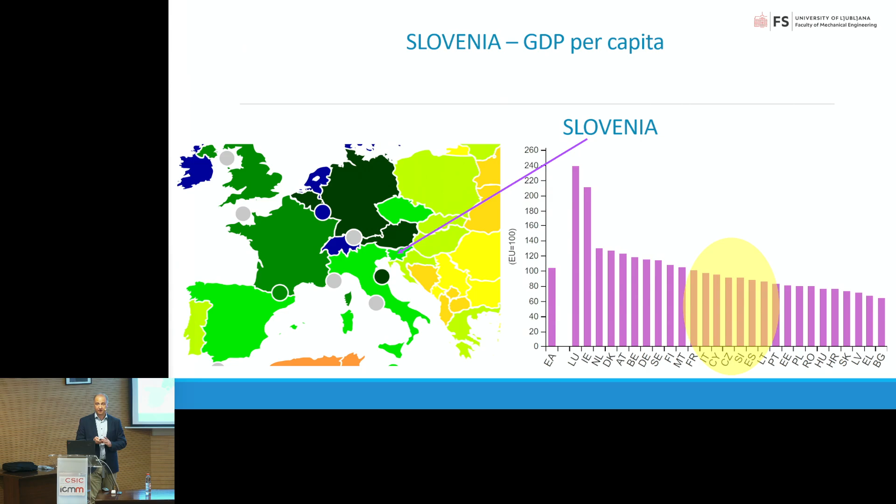Okay, so just shortly about Slovenia. It's a very small country, we have only 2 million people. The surface is quite large, and we have the third largest European forestation, after Finland and Sweden, so a lot of forests. The GDP is not so bad - we have the best economy of the ex-communist countries who joined the European Union.

Also, we are really happy because, you know, in old buildings it's very difficult to find place for the equipment. So we sometimes need to demolish prototypes just to have more space.

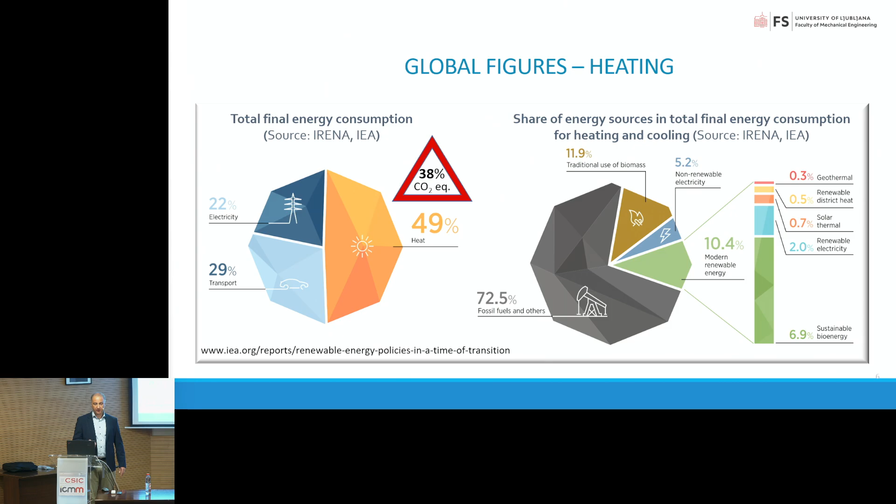What is more is that we waste a lot of heat. We waste most of the heat from different sectors, and related to global energy consumption, this waste heat presents 50% of the final global energy consumption. So it's also 50% of the heating and cooling we need from the final energy use, and actually 50% of the final energy use ends as waste heat, which is wasted. This is really funny to see these high numbers, because they are much higher than in any transport domain. And there is, of course, also large room for improvements.

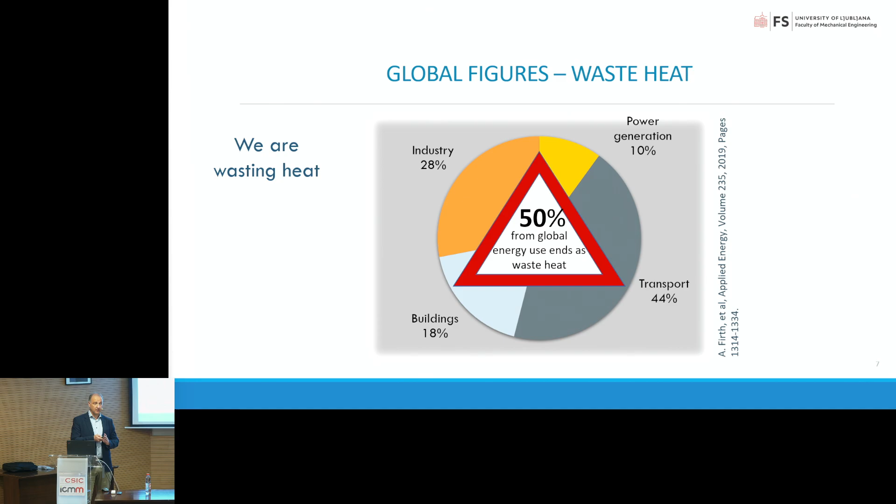When we focus on cooling, that's a bit different. That goes about 20% of final electricity consumption - global electricity consumption is actually related to air conditioning and cooling. And refrigerants, today's refrigerants, cause 8% of global warming emissions.

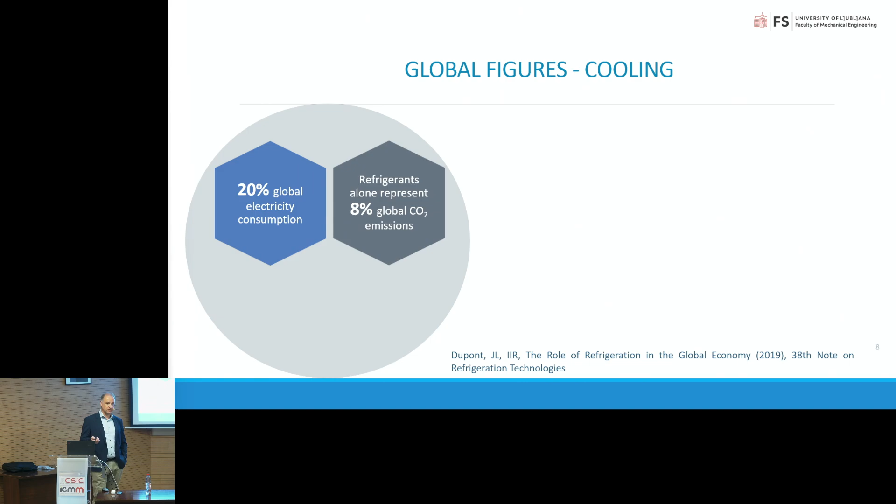I'm speaking about the refrigerants which are related to most of our devices which we use, and these are actually vapor compression devices. What's interesting to see is how the International Energy Agency sees the future development of air conditioning and cooling. They say that it will triple until 2050, which is an enormous number.

Now somebody could say, okay, that's because of global warming. No, it's not so much. We have well-insulated houses, nice glassy buildings, and a lot of internal heat sources from our computers. We also have higher comfort of living than in the past. So all of this together is causing the increase in the needs for air conditioning and cooling, and as the world develops further, these needs need to be covered.

Now the refrigerants, starting from the beginning: the first refrigerants used in vapor compression were natural refrigerants. Then we jumped to chlorofluorocarbons, which caused ozone layer depletion. Then we had others like hydrofluorocarbons, which caused global warming. And slowly we are trying to get rid of them.

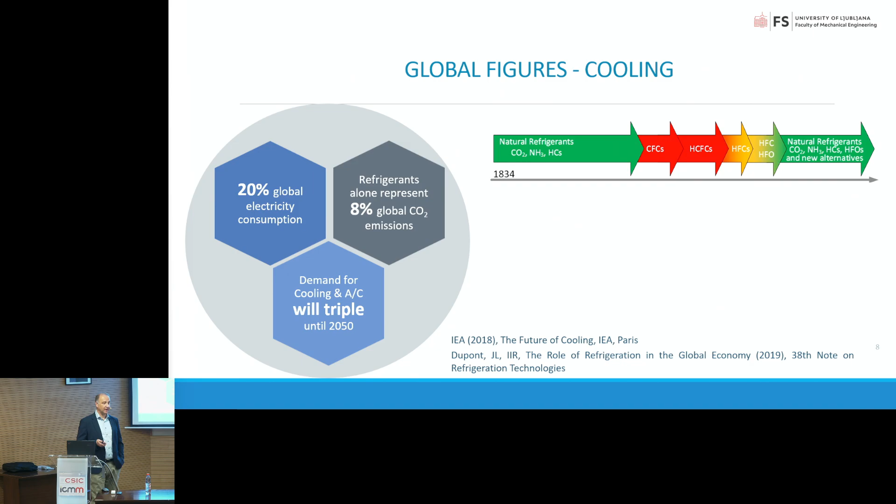Coming back to natural refrigerants - in general, the future of vapor compression and air conditioning will be related to natural refrigerants or hydrocarbons. The problem with these refrigerants is flammability. We have explosion hazards in some cases, toxicity, high pressures - and that's related to all the natural refrigerants, or most of them, and hydrocarbons as well. But actually this problem can be solved.

What you will see is another type of refrigerant, mostly developed in the United States, related to US companies. It does have strong environmental impacts, but I would say those who work with these refrigerants will not really admit that this is true. I speak about hydrofluoroolefins, which cause acidic rain - this was very well investigated by Danish and German researchers. So this was proved, and it is very problematic.

But most of the people who see the future of vapor compression say, yeah, these hydrofluoroolefins could actually replace the problematic hydrocarbons, or natural refrigerants, because of their weaknesses.

I think before going into the development of some kind of technology, we need to know what the existing technologies are. We need to know what we are doing, because just doing something without studying what's going on in the market, or what exists, doesn't make sense. We cannot claim, for instance, that a photovoltaic cell of 10% efficiency would be better than the one on the market if we do not know what is on the market. So this is actually a process of learning.

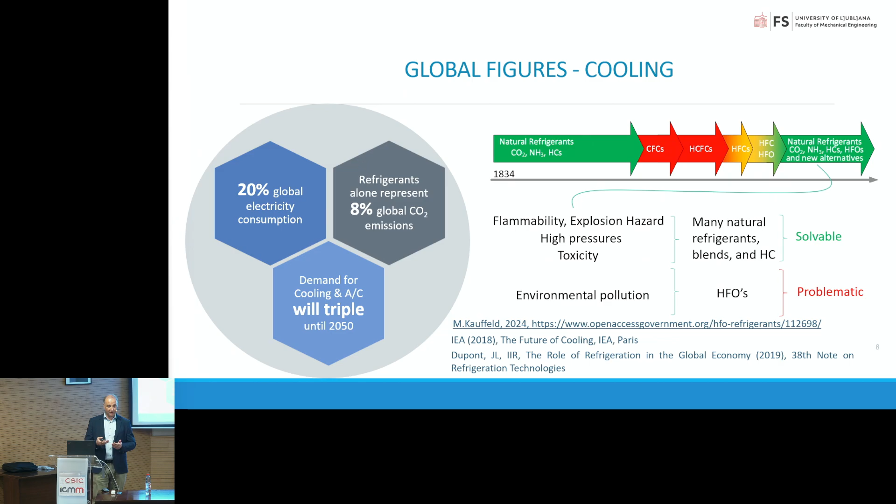What you can see here are three diagrams of air conditioning and cooling. In the first diagram on the left side, you can see a kind of Carnot efficiency of cooling-related devices, starting from cryogenics up to room temperature and above. In this blue region, which you see here, are market-available devices.

So if we develop something which is below this, it would not really make sense from the point of view of our statement that we want to have better efficiency. We need to overcome this if we want to beat, or improve, the sustainability of any kind of technology.

And it's not only this, but when we want to sell it, the very important part is the cost. And the cost is always related to the power density of the device. So you need a small device which weighs nothing, costs minimum, and performs excellently. Of course, that's a dream.

This is the real data of vapor compression systems related to cooling power. You can see smaller devices have a bit bigger mass relative to power than big devices - huge devices, which you see here. It's really a huge number, megawatts.

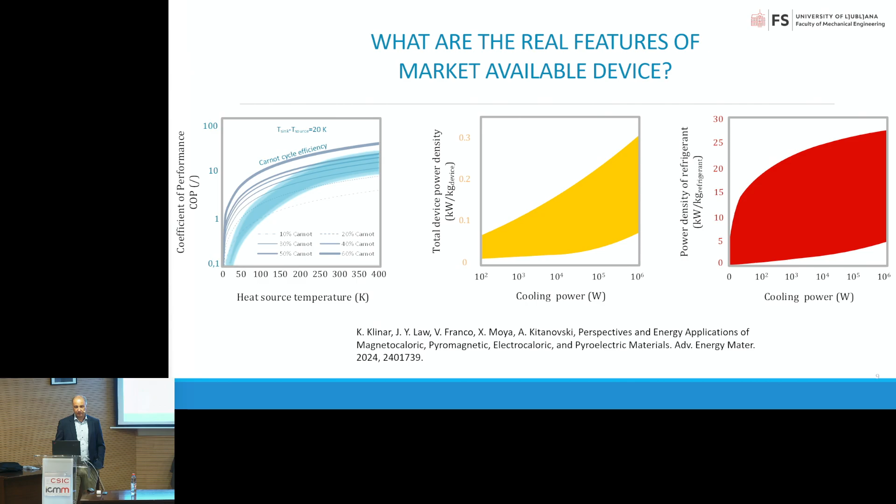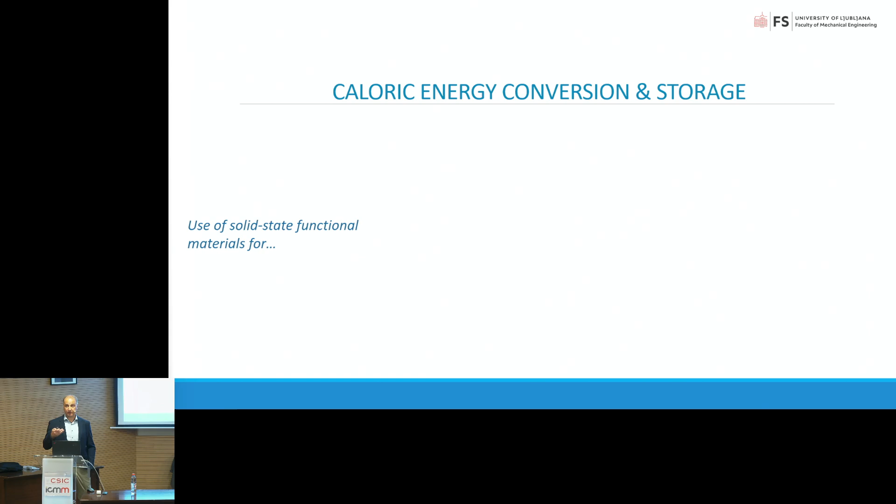This is how I would like to show why we do that. So caloric energy conversion and storage, we see as the potential for cooling, as the alternative to vapor compression, so alternative to refrigerants, but I will show also other potential theoretical advantages. It's nice for heat pumping, energy harvesting, and also solid state phase change thermal storage. These four domains are of interest to researchers who do research in caloric technologies.

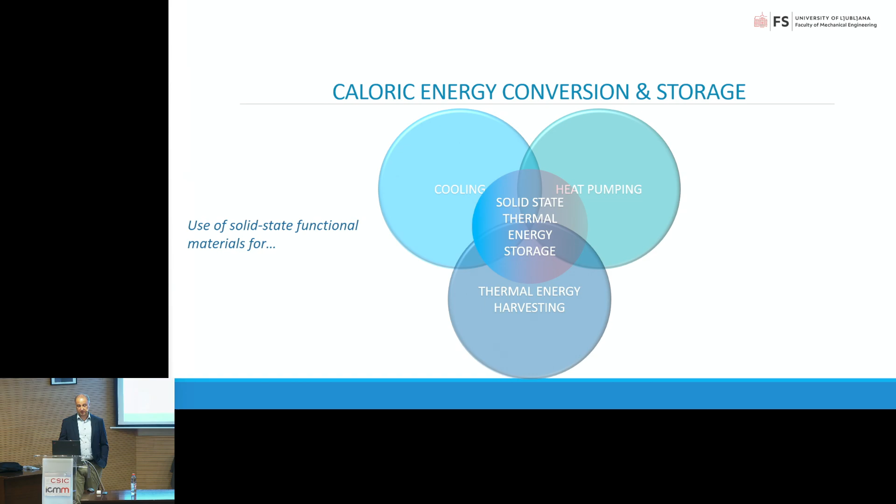Now, before going to calorics, I would like to address why we do that. First, the second law efficiency of devices based on caloric effects can beat vapor compression. Vapor compression takes over 95% of the market, and it is the best possible technology for refrigeration, air conditioning, and heat pumping. Energy efficiency first is also the European directive, so we are really targeting something that could go beyond.

And theoretically it could, because the effects can be really reversible when you compare, let's say, vapor compression, which is a polytropic process thermodynamically and of course not isentropic, and the changes of magnetization and demagnetization of, for instance, gadolinium magnetocaloric material, which are reversible. So the entropy change will be zero, or almost zero, when you magnetize and demagnetize. That means we can really gain a lot in efficiency.

But there are, of course, other problems associated with this, and I will come to that later. So the possibility of having no moving parts is very important. Vapor compression uses moving parts - we have compressors based on pistons, turbines, and so on.

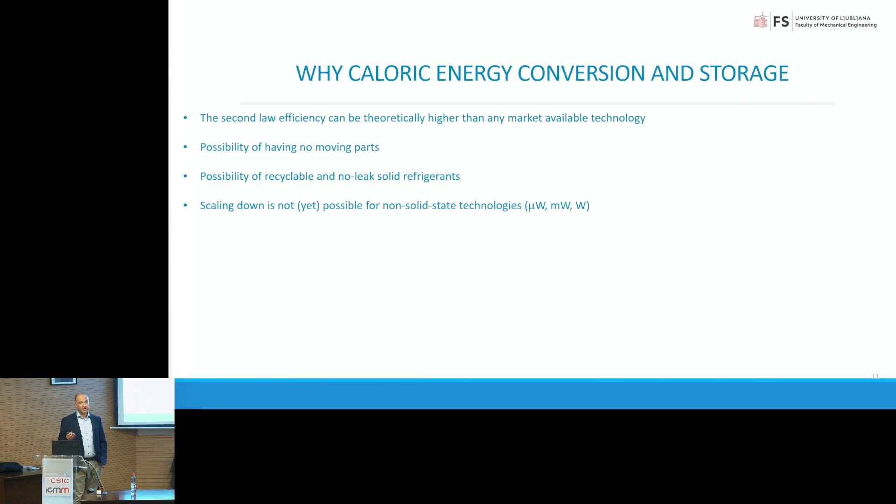Possibility to recycle solid refrigerants, which cannot really be done for vapor compression. Scaling down vapor compression is not possible for microwatts, watts, milliwatts, or up to the range of 10 watts of cooling.

And we see today, for instance, your household refrigerator will in future probably need only 10 or 15 watts of cooling, because they will implement vacuum insulation inside, improving it so much that you will need a very small power to run it. And vapor compression is not ready for this, because when you go to small powers, the efficiency substantially drops.

New and different or special applications are not possible with fluidic-based devices. Vapor compression is also limited to the temperature range between minus 100 degrees centigrade up to about 250 degrees. Above this it will not work, and below this as well, not.

Heat to power energy harvesting below 80 degrees is not possible with most devices. The only technology today which really allows conversion of heat into useful work is thermoelectrics.

And caloric technologies are actually a kind of temperature differential device, like Stirling engines. So in any kind of temperature differential they would actually operate - it's not important at which temperature level.

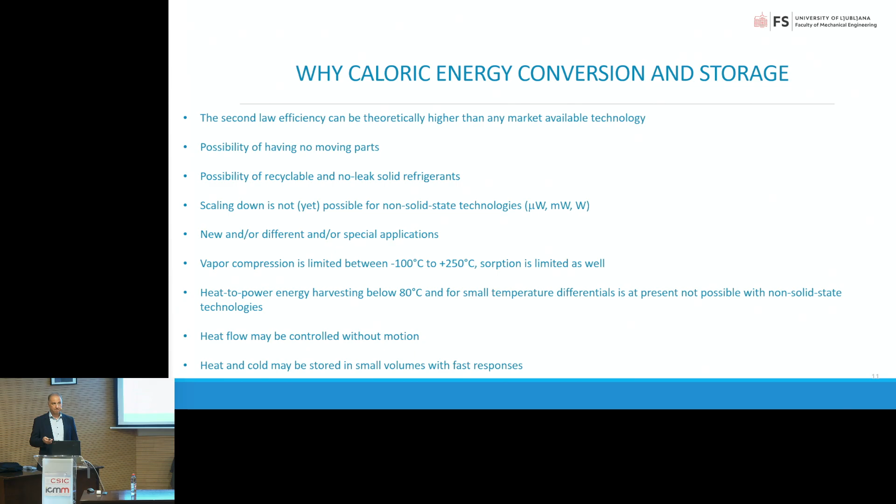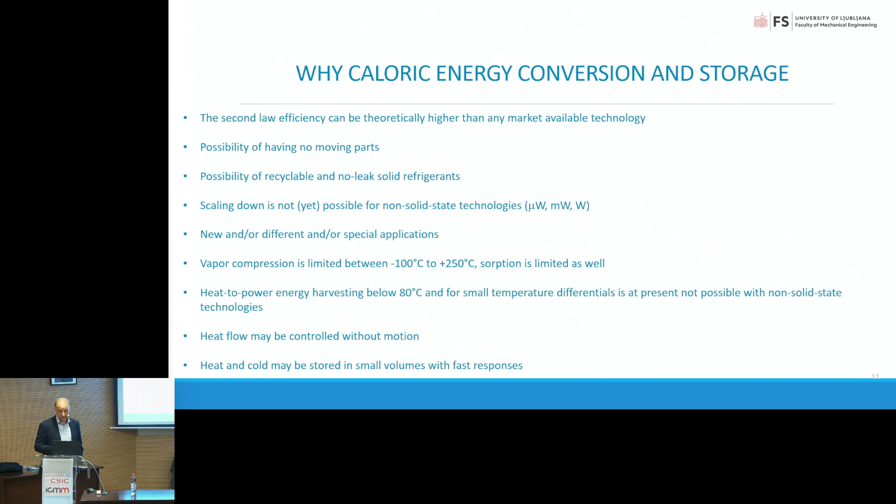About the storage, I will come back to this later, but we can store heat in phase change solid state materials. On the other hand, all the caloric materials are phase change solid state, so this is also the interest we are looking for, because we have phase change there. You can really see this when you observe the specific heat, and then we are dealing also with first and second order transitions, of course, but there are plenty of materials.

Now, if I just jump to the four main effects, I'll go slowly. Let's say we deal actually with a kind of caloric or pyro effect. Pyro would be related to power generation, and this one for cooling and heating. That means we can use magnetocaloric materials where we change order.

By applying the magnetic field, or we change order in ferroelectrics by applying electric field. An analogy from the point of view of thermodynamics is super cool. Really, it's very easy to understand. When you understand one cycle, one type of the principle, you can understand all of them.

Of course, if you enter from the other point of view and study materials, this is totally different. So people from electrocalorics do not collaborate with people from magnetocalorics. They're both solid state physicists, material scientists, but they don't know each other. So we brought them together. But one is playing with electroceramics, another is playing with polymers, which is soft matter, and the third one is interested only in magnetism. So it's really plenty of different societies which you need to merge.

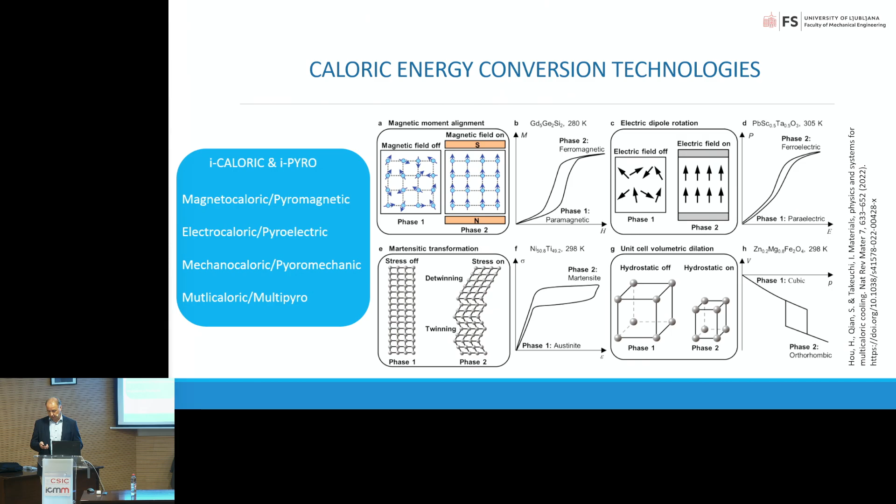So by this, we can really build different kinds of principles of devices, whether applying a magnetic field, electric field, stress, or we can combine even those. There are possibilities that you make a composite of two materials, or you have a multicaloric effect where you gain two effects. For instance, you apply electric field and stress, and you get a kind of elastocaloric effect together with the electrocaloric effect to multiply the change.

This change corresponds usually to adiabatic temperature change, we say. So the temperature jumps, the material entropy goes down usually, and the total entropy increases, or stays the same, more or less, unless you have hysteretic material. This is why the material heats up, and when you release the field, it will cool down. Of course, we also know antiferromagnetic and antiferroelectric materials, which will cool down when applying the field.

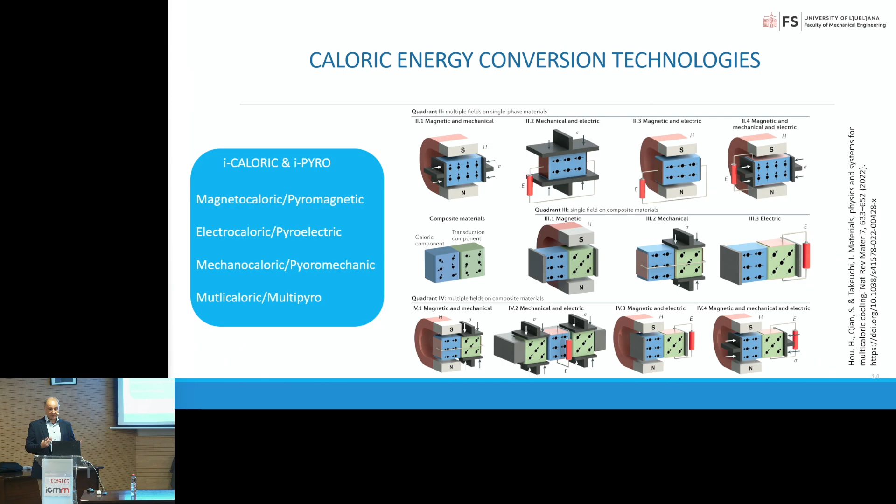So we have a lot of different possibilities here. And now the device which you can build needs also heat transfer, because it's not only applying the field, but you need to shift and bring the thermodynamic cycle, which means you need to bring heat from the heat source, and reject heat to the heat sink. This is normal operation of a device. I will come back to this issue later.

Just to speak about solid state thermal storage, these are some advantages we see, for instance, in solid state change compared to paraffins and hydrate salts, which are commonly used in phase change material storage. The latent heat here is smaller, but the density is bigger. They operate in a narrow temperature interval. That could also be related to calorics. But if you have hysteresis, usually you have a bit bigger temperature span.

But what's more important is you cannot attach paraffin directly to the working fluid. You need a kind of intermediate heat transfer surface, which requires volume, and this increases the irreversible heat transfer, so the device is not as fast-operating as one based on caloric materials.

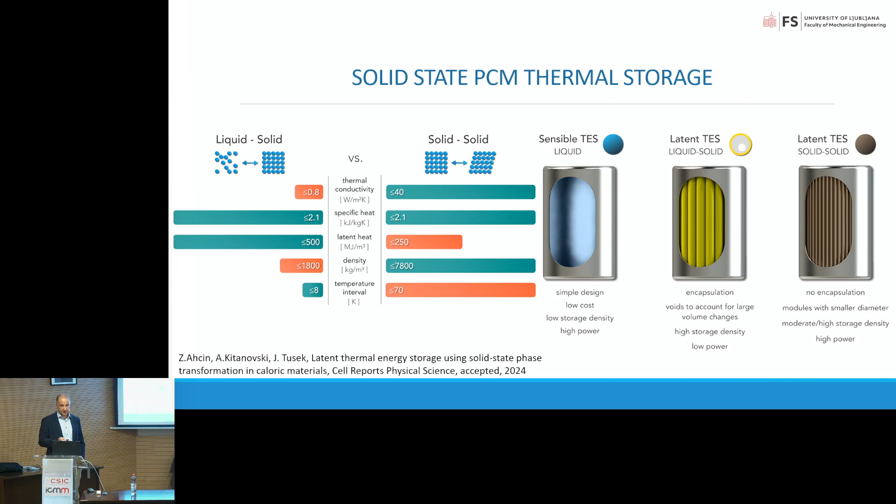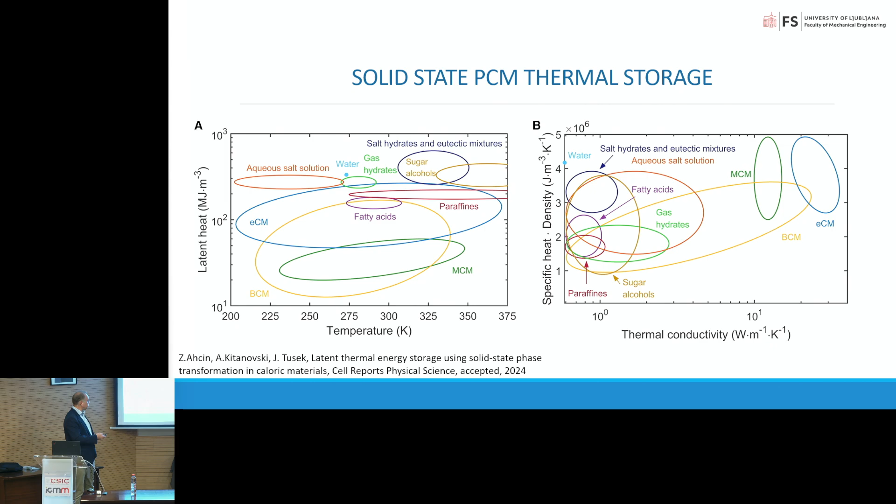Okay, so the basic principle of operation, I will explain through the active magnetic regeneration. This is the most basic process which is used for cooling. The process will be very similar in electrocalorics or barocalorics, and I would say the elastocaloric.

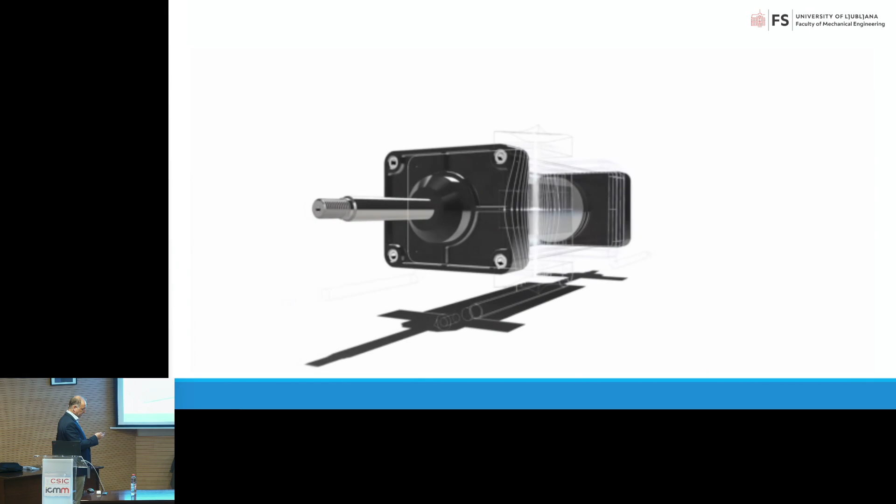So let's say now this cycle, you will see a bit of the regenerator. That's very primitive, but you see two pistons. These two pistons will move the fluid, and inside this structure you see a kind of magnet, magnetic flux lines, and you have two heat exchangers here.

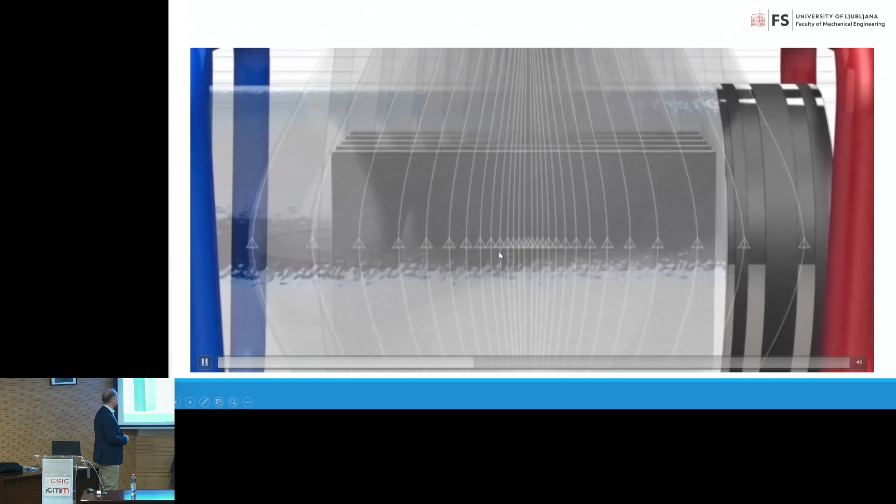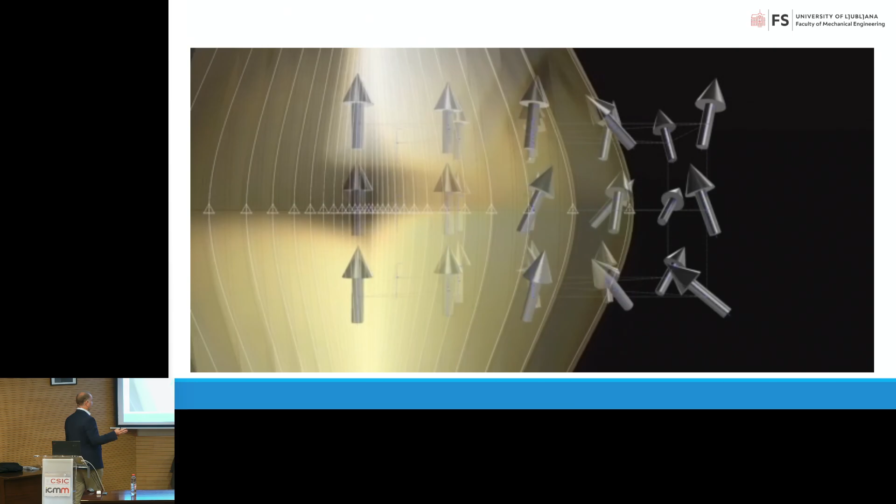This is a heat source, this is heat sink. And of course, this magnet will cause the ordered state in the material, which means it will heat it up. Here you can see a kind of material in a form of plates - these are plates of magnetocaloric material. By shifting the field, we are changing the temperature of the material.

Now you will see later on different forms of this material. In general, when we apply the field, we need to push the fluid from heat source to the heat sink, just to evacuate the heat which was generated away to the heat sink. Then we move away the magnet, or let's say the field source. The material will cool down, and we push it in the opposite direction. That means we have a kind of oscillation of the fluid flow inside.

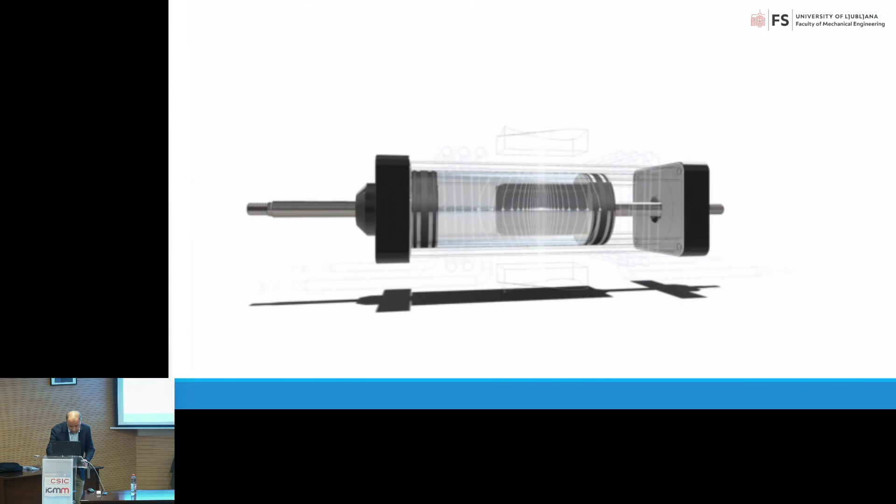This is how, in a steady state condition, after a while you can reach a temperature gradient between the heat source and heat sink, which means you can cool down or you can heat up.

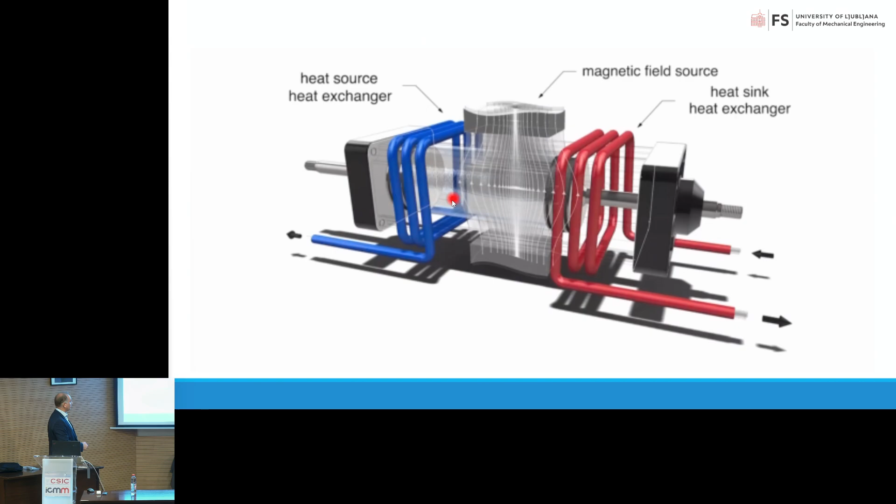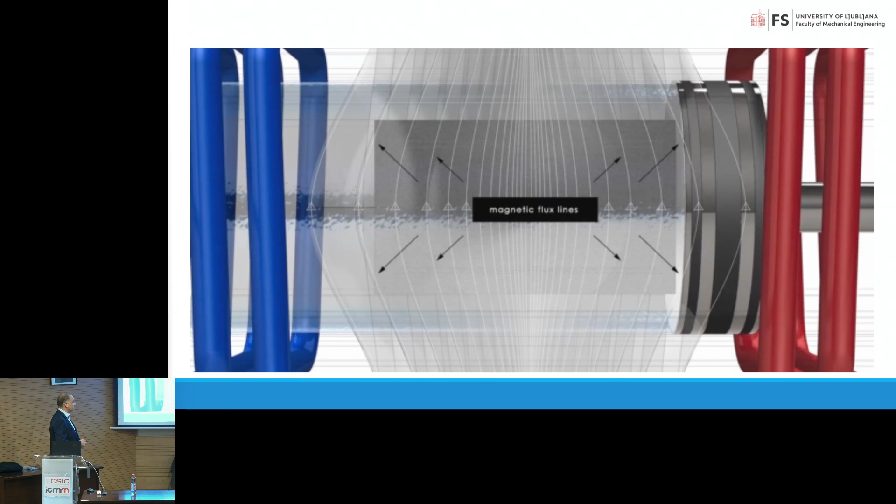So just again to repeat, the point is that you always need to oscillate the fluid, but it should correspond to the movement of, or let's say the change of the magnetic field, electric field, or stress. This is the basic principle, and of course you see moving parts here, because most of the devices built in calorics are based on moving parts.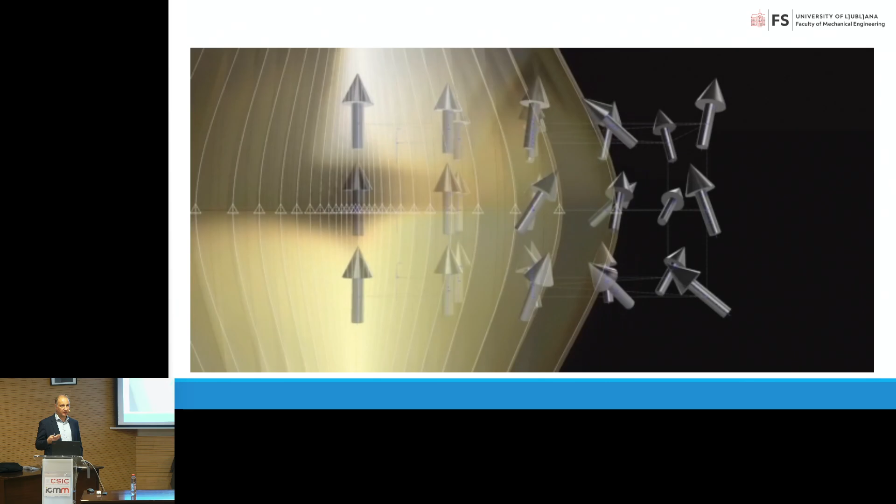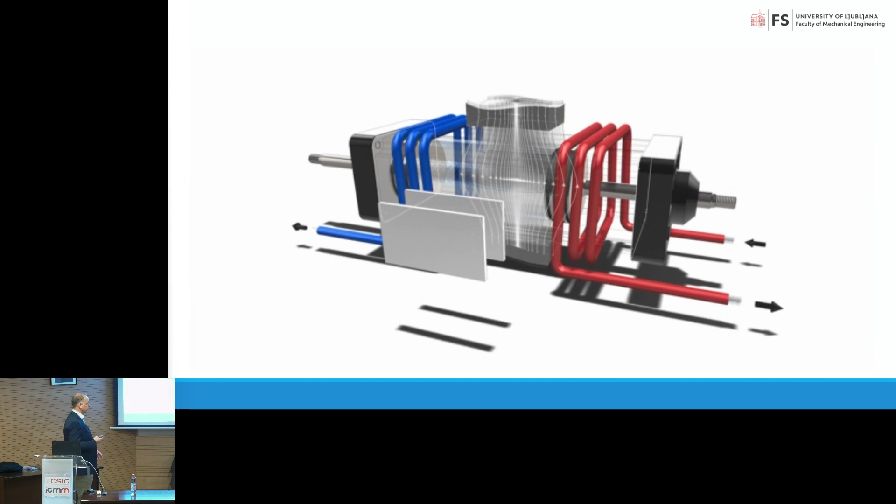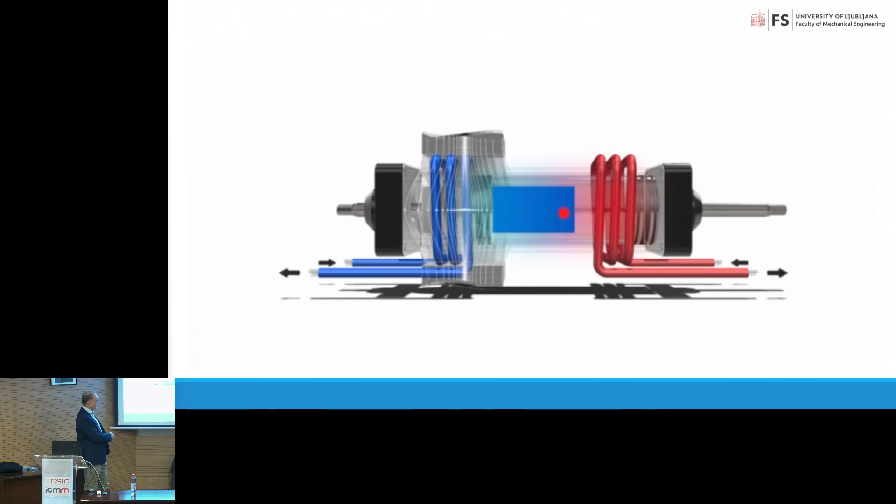Related to regenerators, for instance in magnetocalorics, you can use packed beds of spheres, parallel plates, honeycomb structures. These may be ordered structures, or disordered, like packed beds. You can see the changes of colors show what happens when the magnet goes up - the material will heat up, but you can always see some kind of gradient. In a steady state, you would see the gradient between the heat source and heat sink.

Now, these are magnetocaloric materials. We cannot do the same with elastocaloric. In elastocalorics, usually you will have a kind of wires, or a honeycomb structure. In electrocalorics, usually people will use plates. They can make a structure like this too, but it's quite difficult - it depends what kind of material you use.

Usually nowadays we use a kind of ceramic multi-layers. Then there are thin films, but thin films are really thin. If I speak about polymers, you need to make a bigger structure if you want to get anything out of it. Otherwise, we speak about milliwatts of power. So this is actually a challenge.

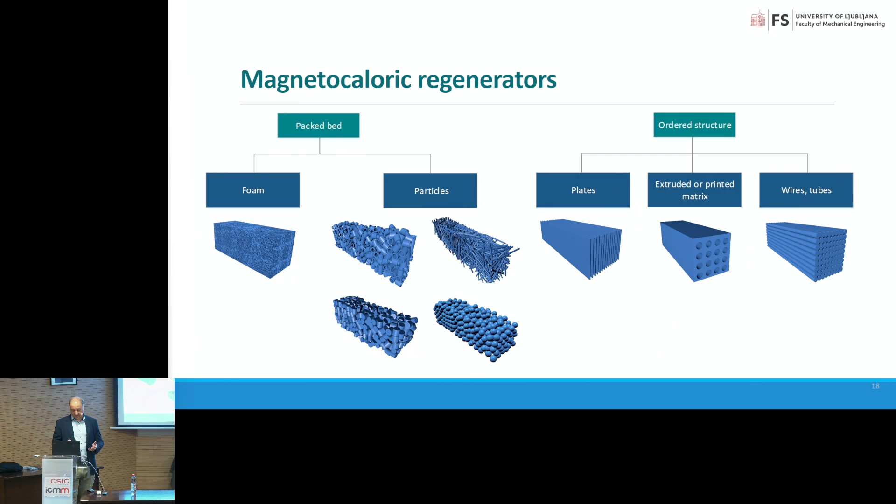So where are we today? I will go shortly through the last 20 years of developments in magnetocalorics. I show magnetocalorics as an example because it is the oldest of the caloric technologies and the most developed. It started, I think, in 1997 with the first prototype for room temperature application. You know that for magnetocalorics, people won a Nobel Prize, because it was recognized as one of the new technologies for cryogenic cooling to approach 0 Kelvin.

But then nobody touched this topic really until the 1980s, 1990s, and you can see here the evolution a bit. I will not show everything, but in the last 20 years you can really see real prototype devices, based on rotation of magnetic fields, linear movements over the magnetocaloric material. What I'm showing here is actually mechanical engineering now. But for this, you need a heart of the machine, which is the magnetocaloric material. This is why the collaboration started, which was very interdisciplinary between different domains, which is very interesting.

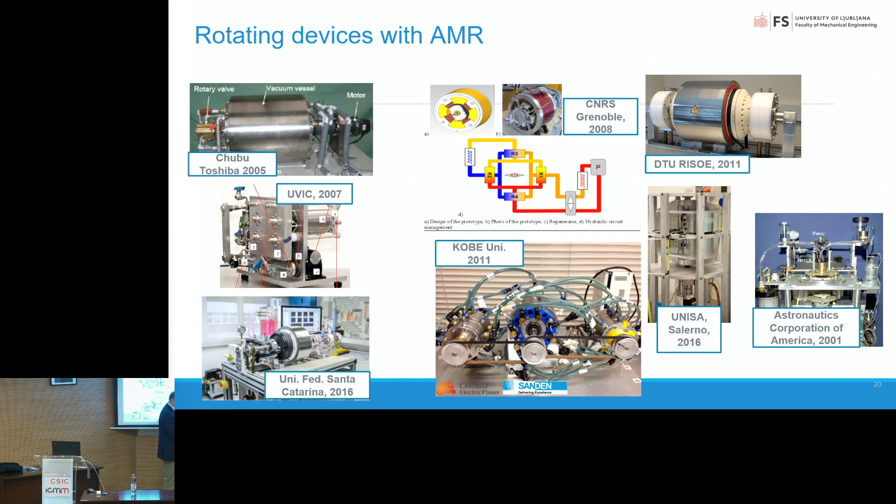I will show you later - that was one of the prototypes which was based on permanent magnets. Most of this is only permanent magnets here, which you see. But then, in later stages, these were really huge devices. Then we got some companies, startups. That's a 10 kilowatt machine, they call it an air conditioner. I mean, this is really heavy, but still people are trying to do that. We were involved in development of this one in collaboration with DTU.

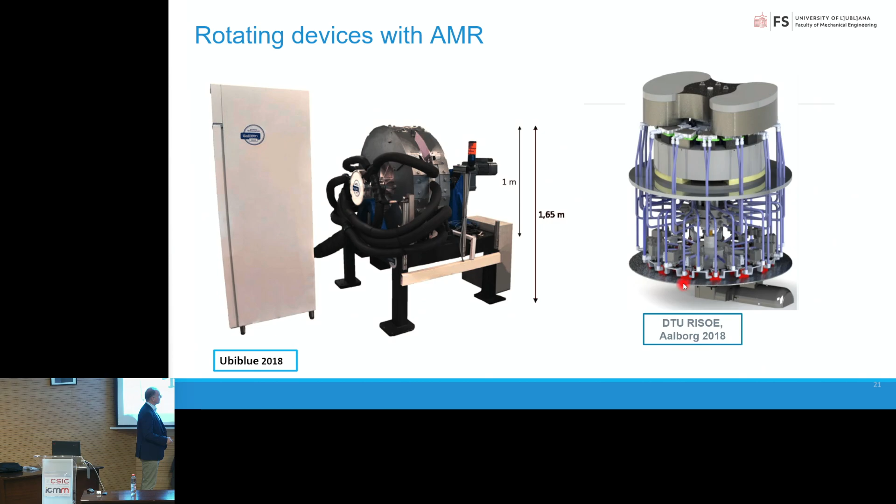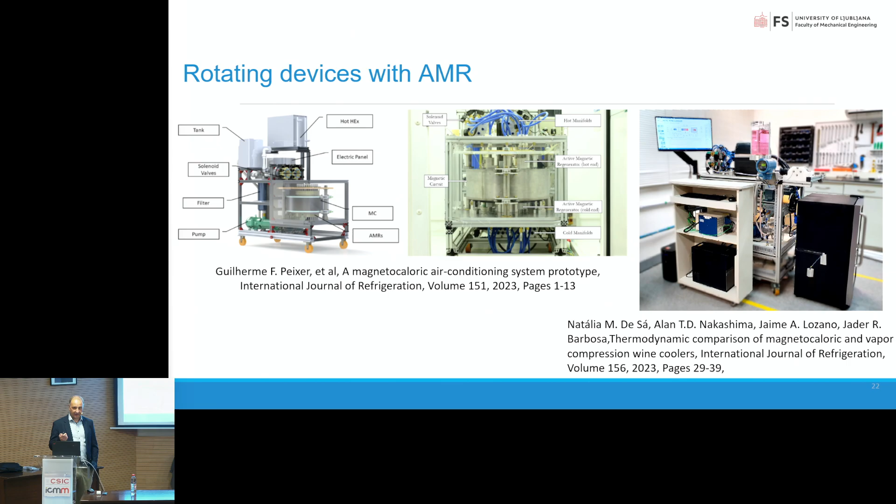And that was actually a household heat pump. We were really trying to do many different kinds of devices, and most of them, in general, were actually rotating - meaning rotating magnetic field or rotating magnetocaloric material in a static magnetic field provided by the permanent magnet assembly. So we learned a lot about how to design magnets. I can design today very nice permanent magnets. I learned to do that because I was forced to.

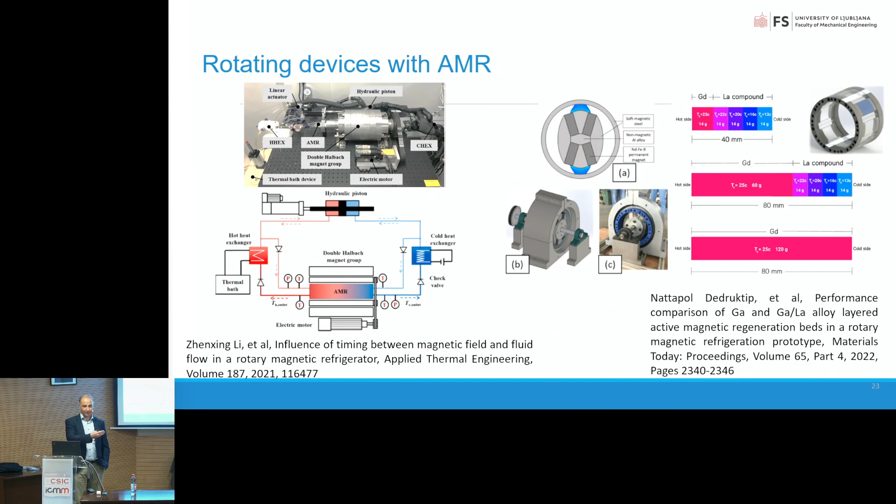This is how I learned also about magnetism. And by having colleagues from material science, I learned a lot about the materials because we were sitting in the same room, speaking to each other and listening to each other. So that was really nice.

One of the last prototypes we built was actually for Gorenje Hisense company - that was a wine cooler. For this particular case, we used an electromagnet because we developed a new type of magnet which has a very rapid change of the magnetic field. We could run it with 50 Hertz, a step function of 1 Tesla in about 10 milliseconds. We have new ones now going up to 1.5 Tesla in the same time, but with even higher frequency.

Okay, but speaking about cryogenics, then we come to superconducting magnets. Of course, the higher the field applied, the larger the temperature span given by the material, and this is actually very important because the higher the field and the larger the adiabatic temperature change, the better efficiency you can get, because you compensate the big irreversible heat losses by having larger temperature spans when you are magnetized, polarized, or whatever with this material.

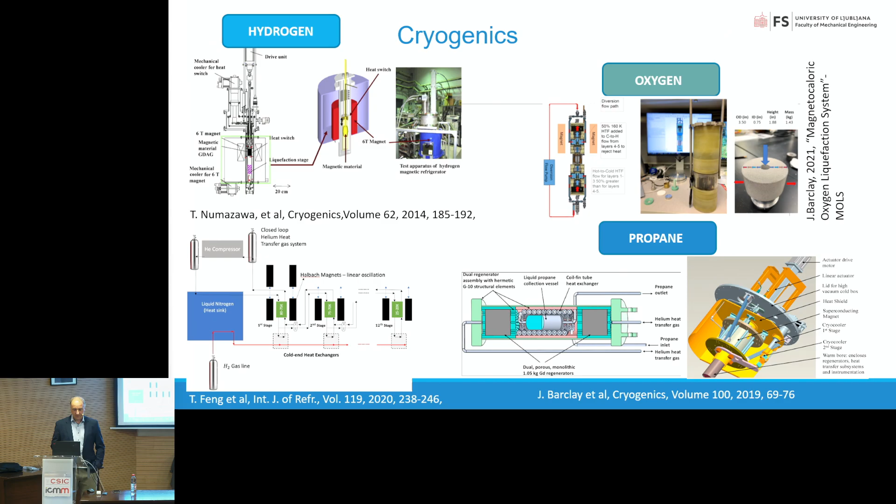So you can see a lot of progress has been done actually in using superconducting magnets for cryogenics, especially liquefaction of any kind of fuels or gases. You can see propane, hydrogen here, oxygen, then we have hydrogen again, methane, biomethane. So it's really a lot of ideas how to use it.

But of course, people just use a normal cryo cooler, you know, and they put some pill inside and move it in and out, and they try to do something with caloric materials - which are really magnetocaloric materials - at very low temperatures, are really good.

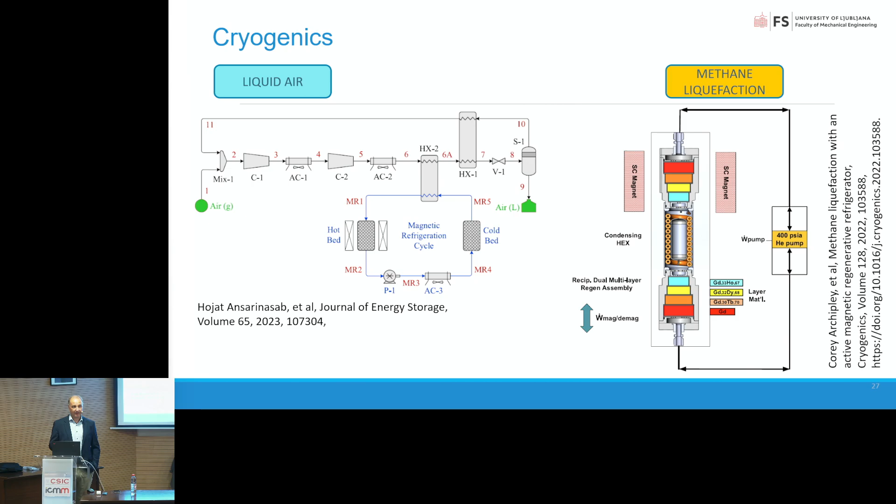We found out that for other types of caloric materials, NASA did some studies in the 90s, probably 80s, about electrocaloric materials. And then nothing happened. So a lot of people want to restart this because, compared to magnetocalorics, electrocalorics can perhaps provide more simple devices, lighter, and this can be very important.

So, okay, not to mention also ferrofluids. Ferrofluids are nanofluids - you have nanoparticles suspended in a carrier fluid. The pioneer in this field is actually Rosensweig, Ronald. He's actually the inventor of ferrofluid. He opened the company.

And I had the privilege to, and I have the privilege to know him. He's very old now, and he taught me about magnetocalorics. Because he did this in the 1960s and 1970s - in the 1960s he wrote some papers about how to make magnetocaloric energy conversion by using magnetocaloric fluids.

They were dreaming about how to use waste heat and convert it into electricity, with no moving parts or moving parts and so on. Today, we tried this as well. So when you apply the heat source and heat sink over a static magnetic field, you can get the pressure difference which makes the propulsion of the fluid.

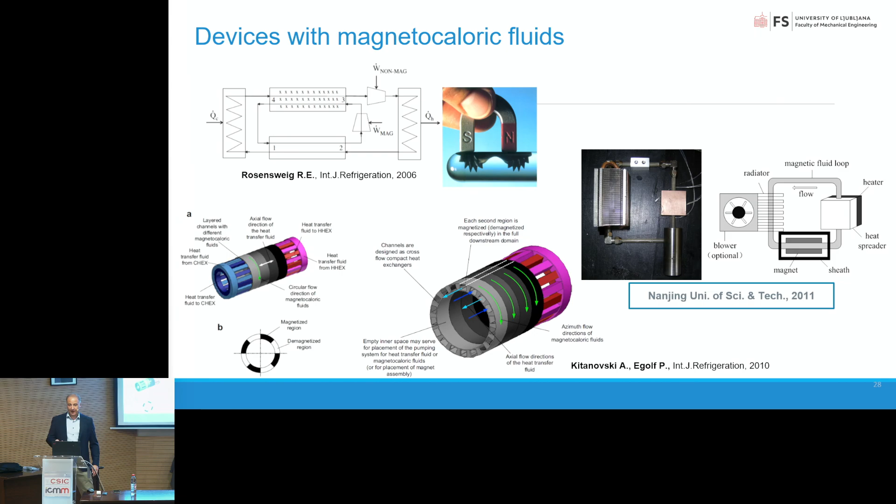This means that you do not have a pump, but you need heat and magnets to propel the fluid, which can run over the heat sink or heat source, without any moving parts or external power. But there were some ideas how to use this also in some other domains.

Okay, in recent years, this was actually the revisited domain, thermomagnetics, how to make power generation. But thermomagnetics starts in 1700.

The first idea was the Curie wheel, and later came thermomagnetic power generation. There was an idea of how to change magnetization due to temperature difference, and that change would cause an actual change in force, which would make a linear movement or rotation. These ideas came to reality much later than Rosensweig and others wrote about, starting from the 18th century.

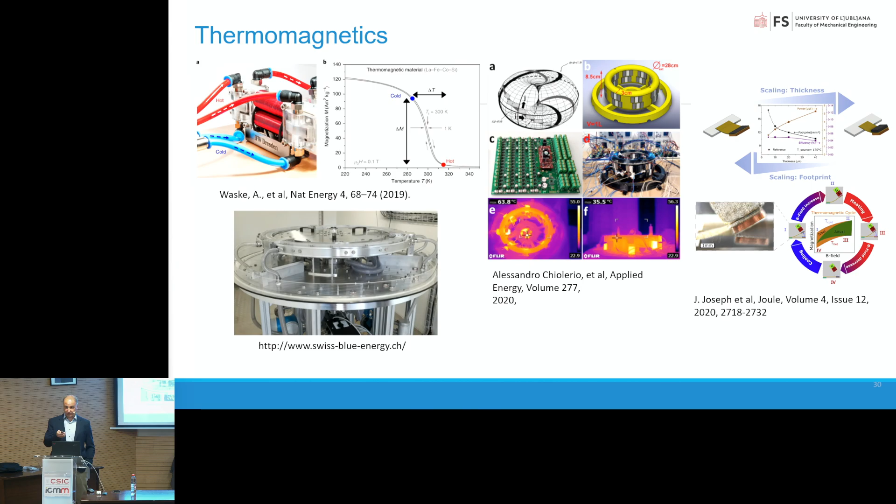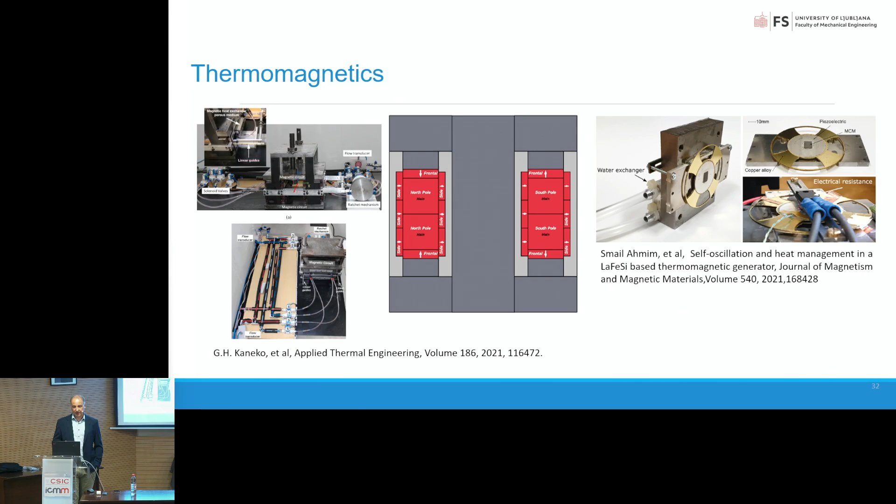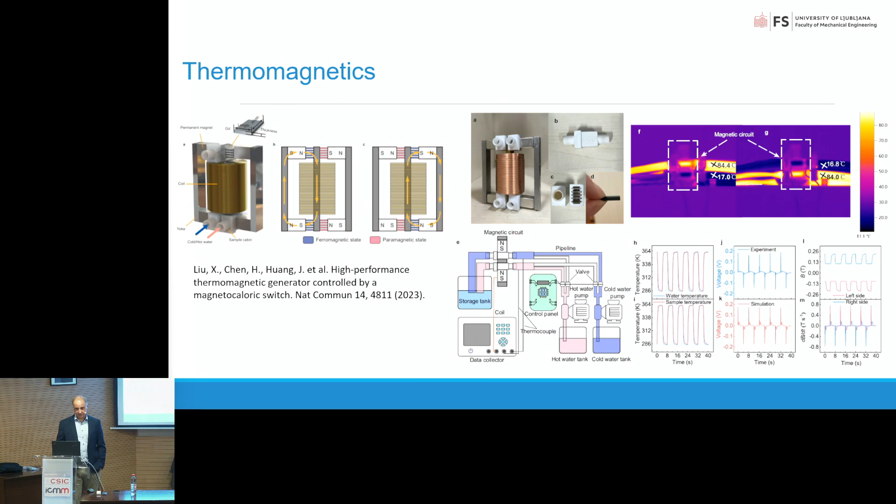You can see a few devices today. We also have a European project now running on this, a doctoral networks project where we need to develop a thermomagnetic generator. There's a lot of different kinds of approaches—you can see some heavy metal stuff, but on the other hand, some people are going to very fine structures. All these people I know are coming from different domains. So it's really interdisciplinary research involving electrical engineers, mechanical engineers, chemists, solid state physicists, and material scientists—these are necessary domains, and we need to be involved together.

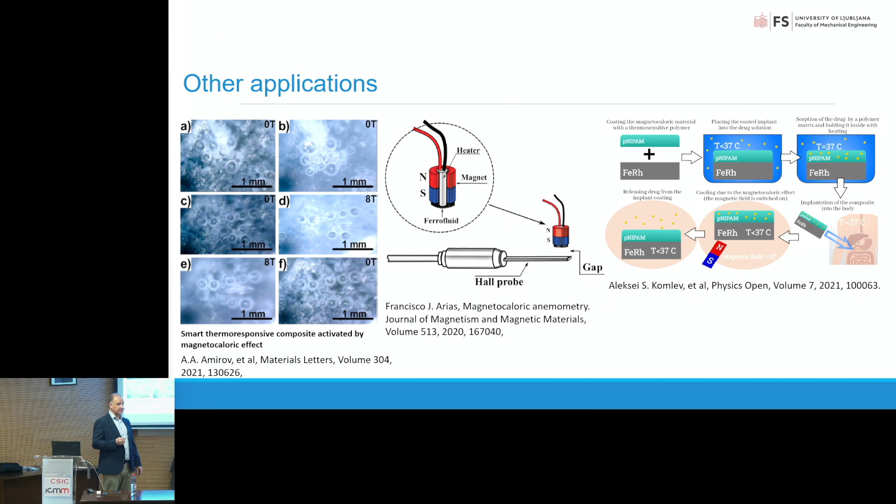Another application of magnetocalorics I was involved in: we were dreaming about injecting nanoparticles of gadolinium into cancer cells, not to do hyperthermia, but to use the magnetocaloric effect. That was one of the projects we did in Switzerland. But there are also others—you have magnetostriction and electrostriction, where materials can open or close, meaning you could actually make drug delivery devices. So there are some ideas for how to do that as well.

Now we have a lot of challenges. The problem is that materials are not as performant as we would like, which is why we need such huge devices. On one hand that's the issue, and on the other hand, we have huge problems related to heat transfer. So one thing is the materials.

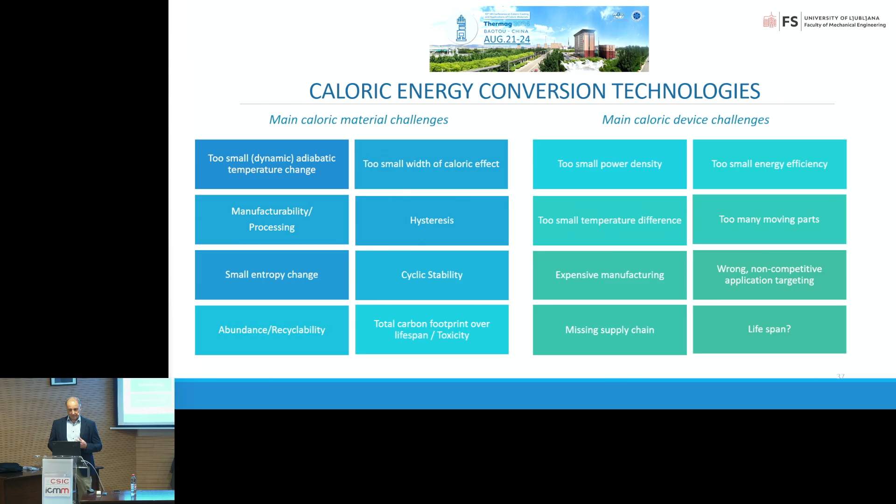There are many things, but in general these are the challenges we need to solve in the future. We are seeking materials that go beyond current limits but with more modest field sources. Cyclic stability is very problematic in some cases, also in elastocaloric materials. First order materials that are sintered are a big problem—they can pulverize when cycled. You have electrostriction which breaks very brittle PMN-PT material, for instance. So there are really different cases, or needs, which we need to address.

On the other hand, this is also very important—when we use gadolinium and rare earths, it's an issue how to deal with this, and also how to recycle it. These issues need to be solved, and we know that, and people are working on this, but we are a bit too slow relative to what we promised at the beginning when we started.

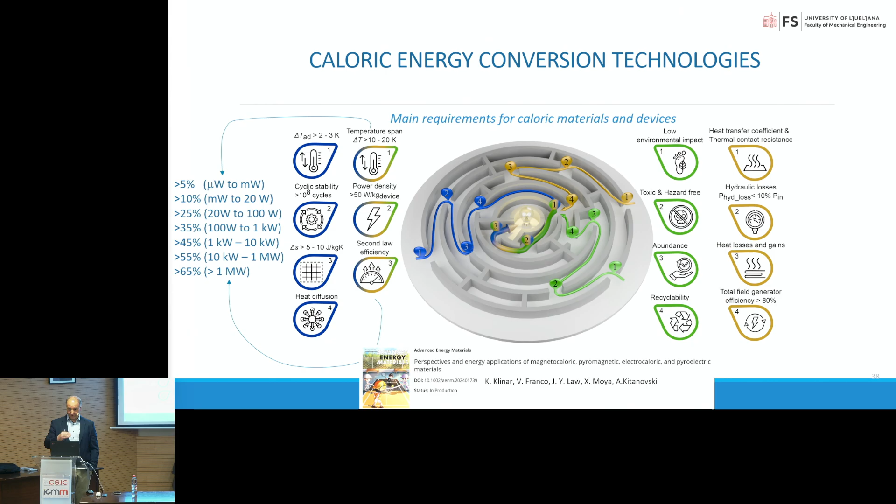We didn't know where we would end up or how far we could come with this, but there are really challenges that demand the community think out of the box. Without this, the community will actually start to converge. Like it or not, that's the reality.

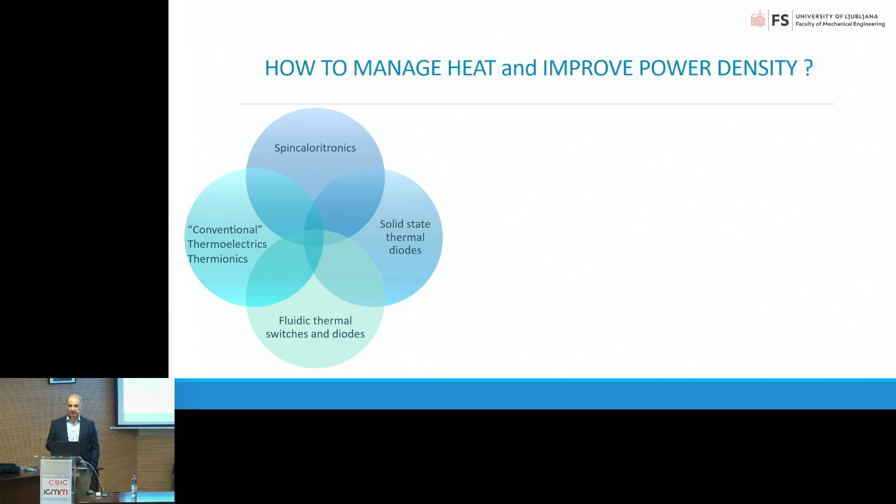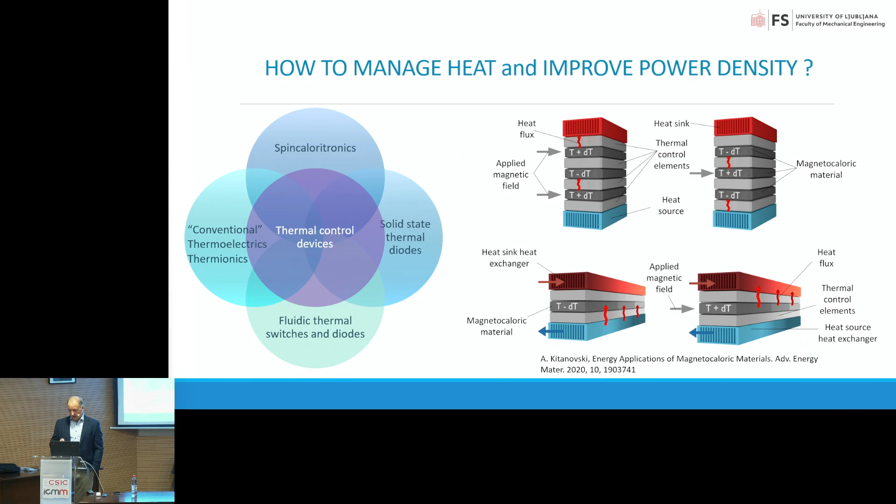So I think we really need to do many things, and this means merging calorics with other domains related to thermal control devices. Why do we want to do this? To get rid of all the moving parts, at least in electrocalorics and magnetocalorics, and to provide, instead of contact between fluid and material, contact between materials—then to provide not oscillatory flow, but unidirectional flow of some fluid, which will be much simpler. I will skip the presentation of the working principle, but I will leave it here so you can see it or run it.

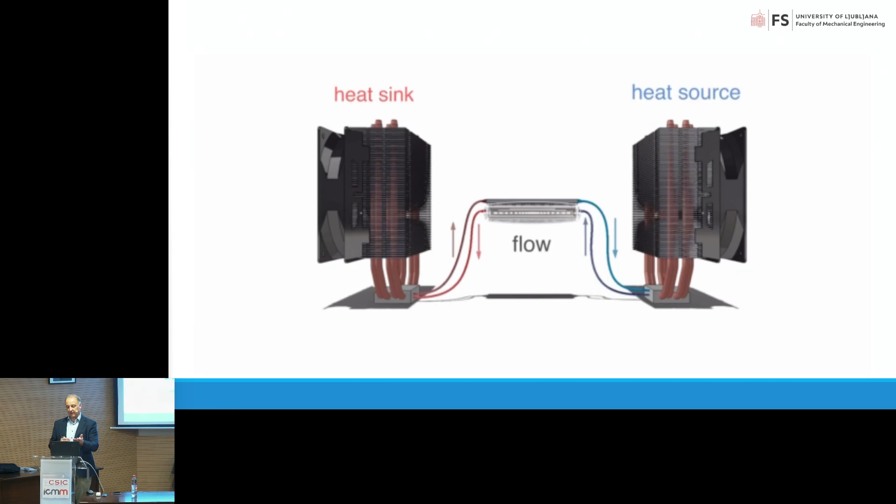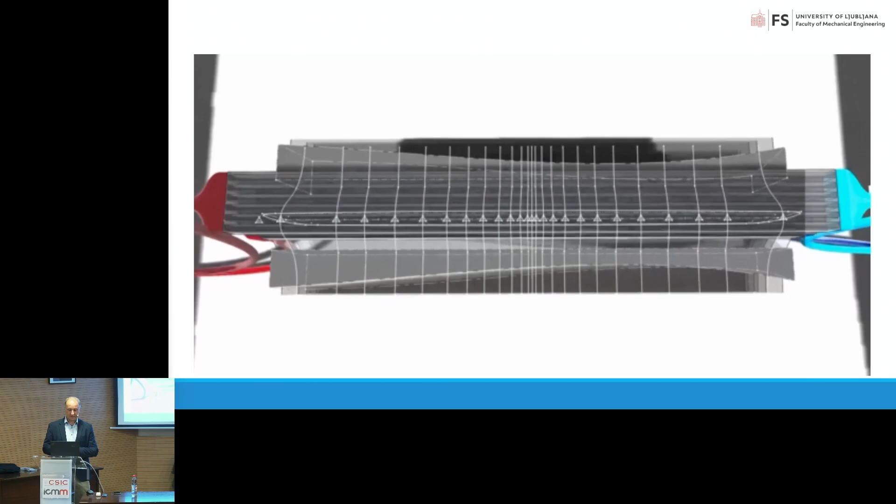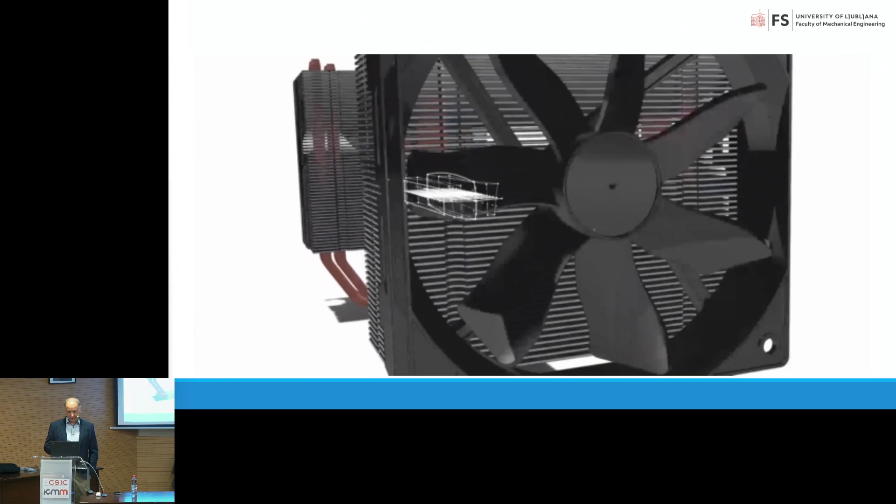How it should work is related to thermal switches and thermal diodes embodied between the caloric materials. In this example, the movement presents the change of the field. This example is related to a microfluidic thermal switch based on digital microfluidics, where we move droplets with electrostatic forces, changing the angle of wetting—this is called the electrowetting effect on dielectric. One of my colleagues is developing this, but the major point is how difficult it is, because you need to not only develop a concept of the device.

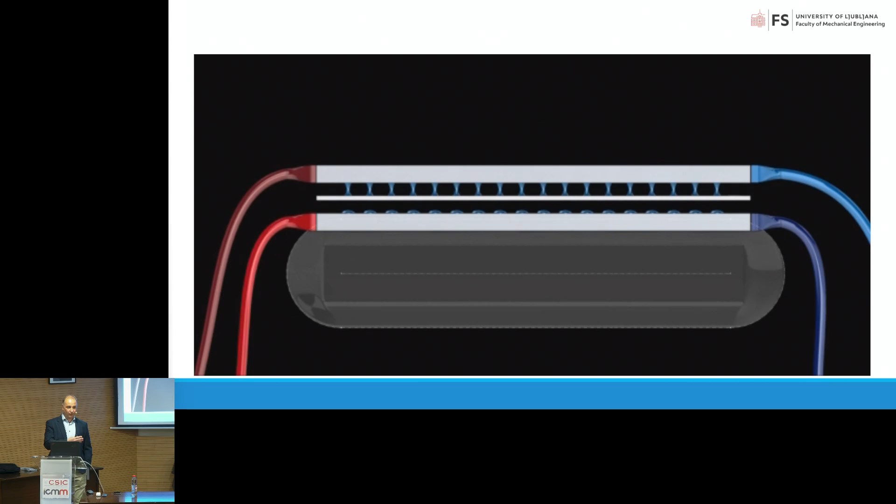You need to know people who know how to do it - that's micro engineering or even nano in some cases. If you skip these kinds of devices and want to have fully solid state, you need material scientists, and you need to strongly collaborate with them.

So these two domains, from my personal belief, could rescue the caloric technologies to become market competitive. Otherwise we cannot sell such large devices on the market. I was just coming from Cambridge, where we had a conference on calorics, and one guy presented a 10 kilowatt barocaloric device from a startup company.

I asked how heavy is this device, and he said a few tons. I said, do you know the weight of a 10 kilowatt vapor compression device? He said no. I said, well, a few 10 kilos. That's the reality - these are really like two different worlds. I know this startup will get some good investors, but in reality I don't know how far it can really go, because without solving this, there's no chance.

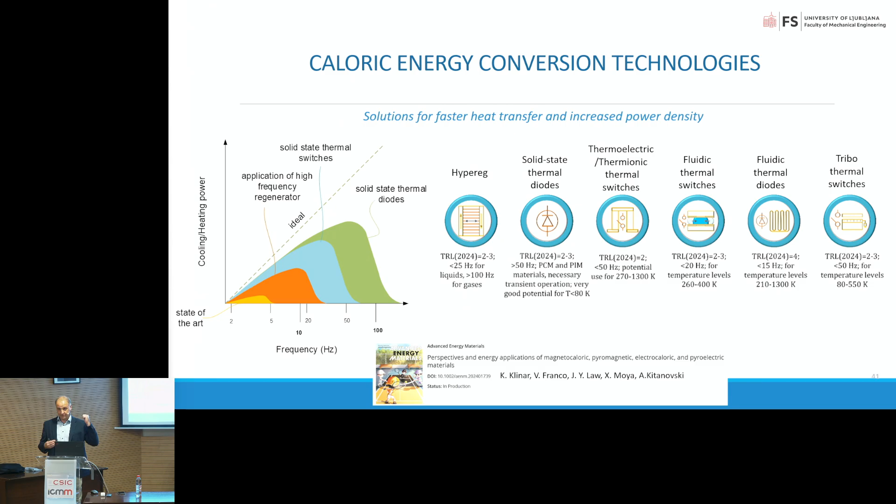We all know this - when you're really deep in the field, you know it will not be possible. So what is possible is, I see these domains.

You need to target domains where - Mikkel, just tell me if I'm too long. How long can we take it? 10 more minutes, yeah.

So this is where we want to get actually, to find the good ways, to find the gaps where existing technologies cannot beat you, because we know we are at the beginning. We will need the next 20 years of development to reach some levels, probably to do really something good.

It's not a 3-year project where you develop something from TRL2 to TRL9 - I think that's impossible. We should have other types of European projects where you go from TRL2 to TRL9 in 10 years, because some technologies are so demanding that it's almost impossible to do it in such a short time.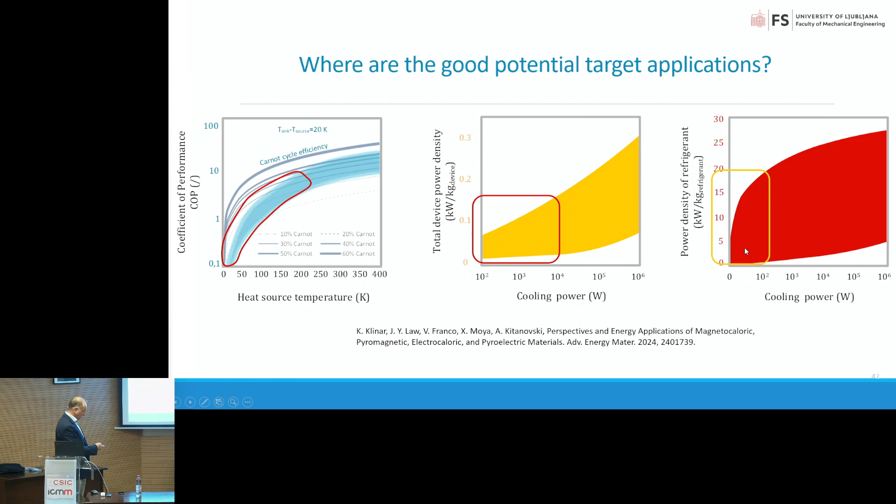Here I just show examples where we see the gaps which can be fulfilled. Another type of this can be seen here. We can clearly see that cryogenics is one domain which will be very interesting, but small differential heat recuperators which can also upgrade heat are very interesting too. High temperature heat pumps, ultra high temperature heat pumps - that means you can really use them in industry.

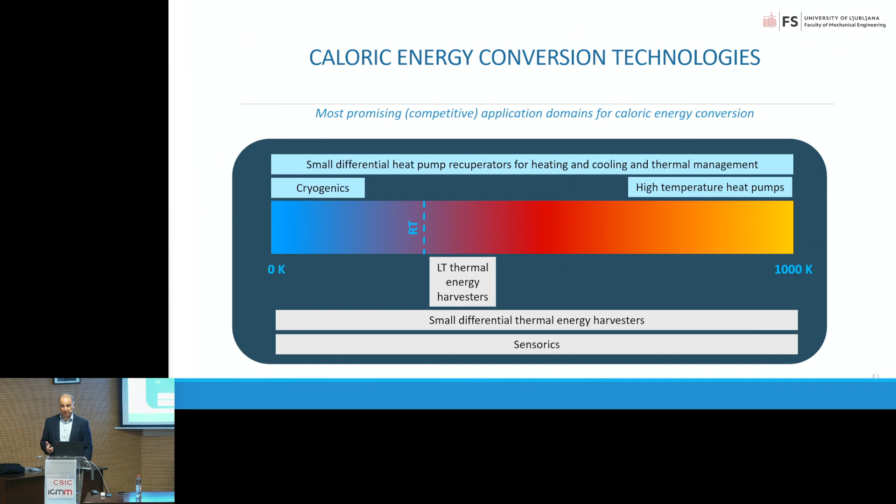Low temperature thermal energy harvesters, sensorics - if you look at piezoelectrics, you already have plenty of sensors today, and also small differential thermal energy harvesters. What's good is there are no fluids necessary, so perhaps you could even use this in space, which is an advantage, and it can operate at different temperature levels as well.

So there's one thing I'd like to emphasize - how to bridge the gap between different domains or societies where I am involved. I'm speaking from experience because I really collaborate with many people, and we've had a lot of industrial projects - these are some of the companies here.

Mikael asked me to give my opinion about this - how do I see what is really wrong? Going through this gap, I think we can jump over it. We can really try to make different kinds of examples of collaboration.

In general, I think it's really a big problem, because I know how people think - I speak with them, I live with them. Common situations - I will go critically through all three domains. This is basic science, where people want to see the fundamentals. We had one guy winning an award for titanium dioxide for solar cells, and I asked, do you already think about the company and where you could apply this?

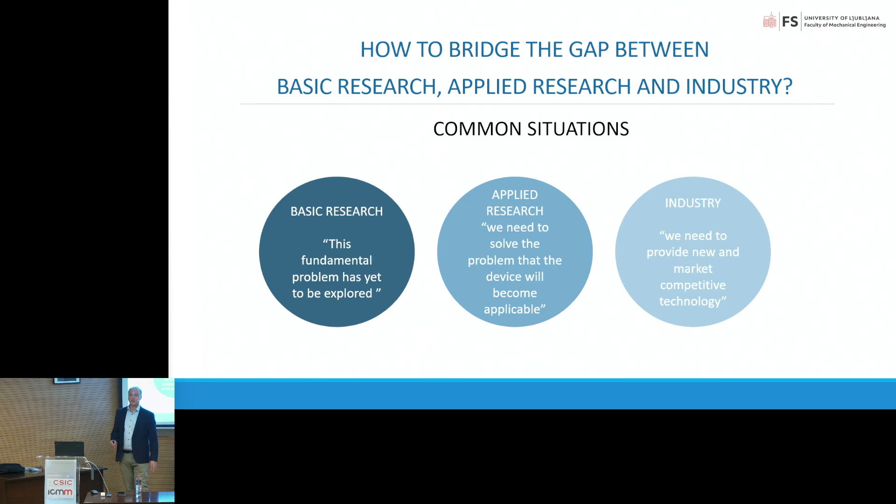And then when we go to industry, they will not care about what we do. They will just say we need to be competitive on the market, and we need a new product. And that's when you start to think about how these people should interact, it's also probably very interesting to see where they find the financial sources.

These are the main ones, and of course this is market-driven. We're not so much, but we are a bit depending on them. And this is really also about how many publications people publish, because this is the aim of what we're doing. I see also the difference. I'll give you an example in calorics: we have 1 paper on devices per 10 papers on materials. And it should be equalized better in order to have more progress in innovation.

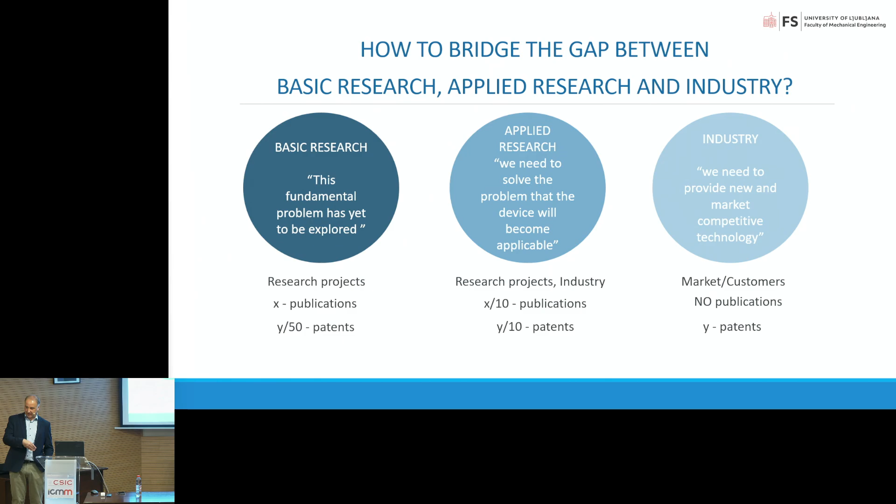If we want to bridge this, for them it's quite normal that they have no publications. Some companies do, but usually they do not publish, because of intellectual property rights and so on. Then patents - we see a large number of patents are really interesting for the companies. More applied science, less basic science, and then excellent basic knowledge.

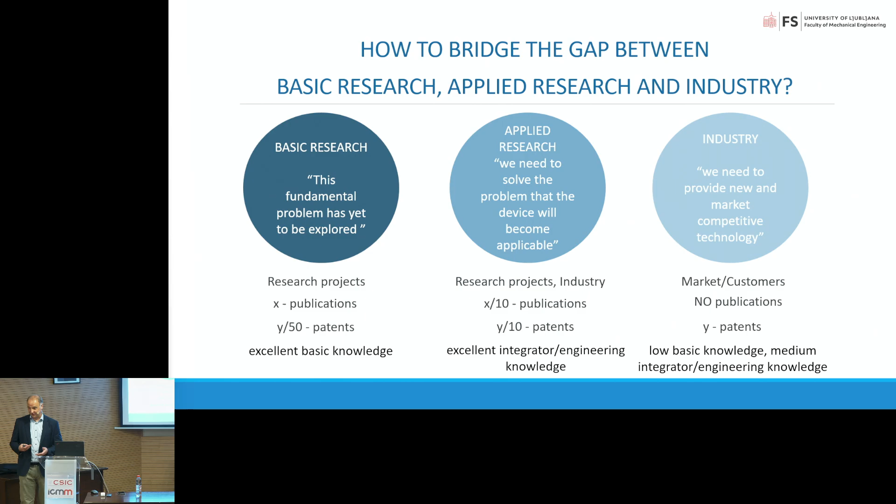Here, excellent integrator, but actually low basic knowledge. And then actually low basic knowledge and medium integrator. So it's really going from one domain to the other one. And of course, now how can we understand each other? How can we really work together? That's really a question, it's really a challenge, how to put these things together.

From these two, I think that's quite simple, but we need to understand each other. This is from one domain where I see how we collaborate, for instance - if you know the phenomena but you don't know how to apply it, we can find the application. I remember when we started the first electrocaloric prototype, that was the second in the world, and then we made the third one.

I was with the team of electrocaloric in the ferroelectric department of electroceramics. And they said, we are developing a kind of ferroelectric which can be perhaps interesting for cooling and heating. I said, is it electrocaloric? Yeah. And they said, but we don't know what to do now. I said, okay, let's bet that we make a machine for you. And they said, yeah, okay, let's do it. And we even did a US patent after that. But it was a collaboration where they had the knowledge how to do it, but didn't know how to apply it. That was really interesting.

But that required mutual collaboration - that means my people went there and their people came to us. We need to exchange people to get a better understanding of each other. Otherwise, it's so difficult. And this is one case which I see.

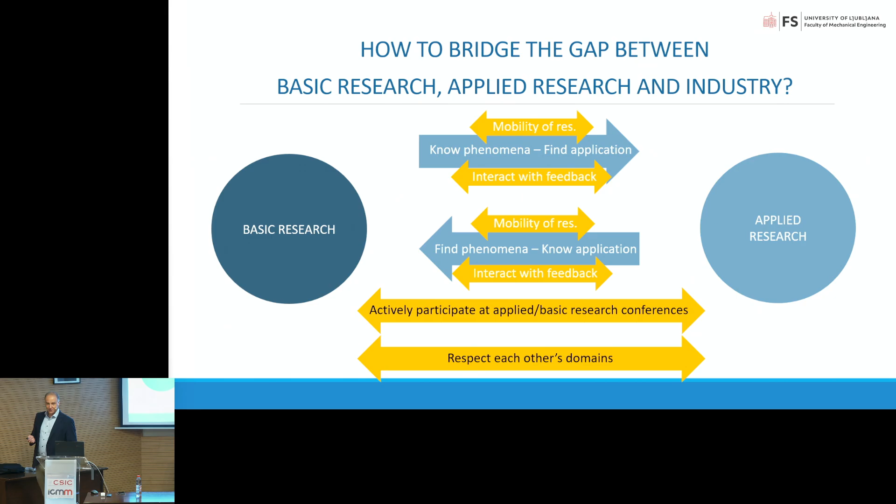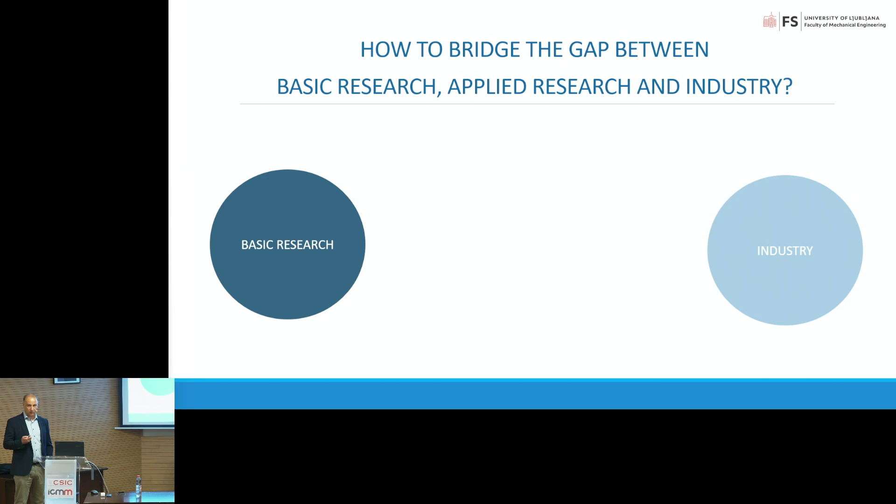If we go further on, I see something because of how I learned it from applied science. I think it's very difficult sometimes to get into contact with industry. That's really a challenge. First of all, you need to gain trust. Without gaining the trust from industry, they will say, well, they have no idea what they are doing, they're just dreaming about some basic stuff, and we will never apply this.

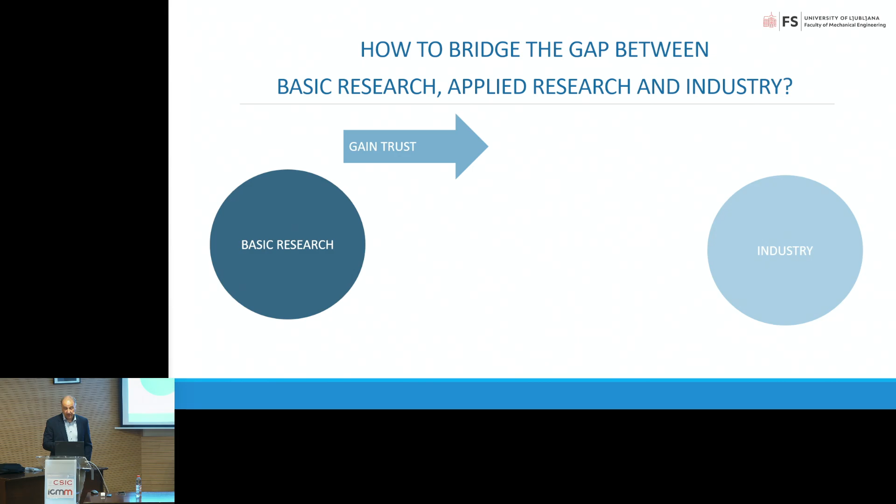I know they really think about this industry, and this is, I think, we need to be humble. They will not be. They are very proud, and I think they will really look at us a bit from the top, you know. But we need to approach them.

Because without this, you can offer them measurements, master degrees, PhDs, you can create a public competition for students to solve a given problem, but somehow you need to do this also for free at the beginning. Because if they do not trust you, that you are capable to do something, they will not do it. And this is what I see.

We spent really many years to gain, let's say, the Gorenje license. We have now 10 years of collaboration with them, but with one or two bad events, we will lose them forever. You know, if you do not keep the deadline, for instance. Well, deadline, yeah, it really is a deadline. It's tomorrow. You have to have it, and it has to work. So it's really a bit different way, you know.

And then I think this can open the door also that you actually have PhDs and master's degrees in the industry. They're your colleagues. They will understand you much better than people who are employed today. And you need that. And then of course, I think you need to invest the time to learn market needs and market applications. Sorry, I know it's a bit strange, but we need to do that.

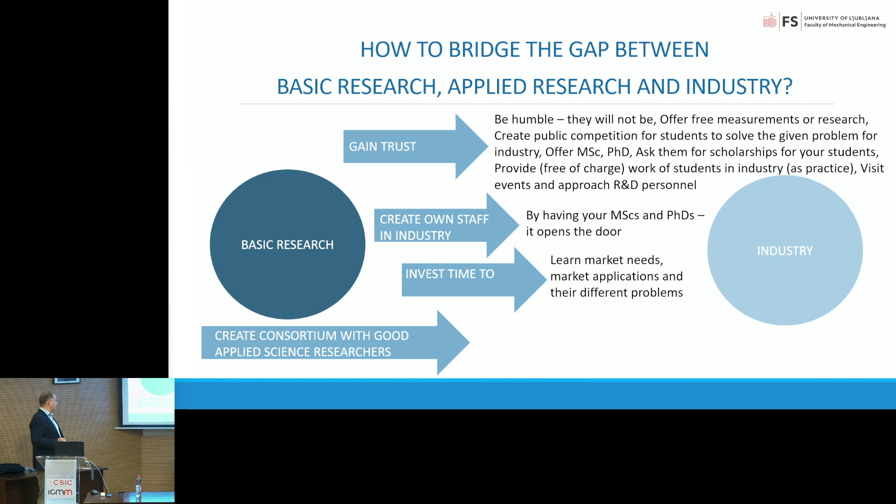Because otherwise we will dream about something and we cannot offer something realistic to the other guys. And then also I think a consortium with good applied science researchers can really be helpful. You lose a bit in gaining money, but together with them probably you can be stronger in finding really good partners, and you actually approach them together. That's, I believe from my point of view, really necessary to do.

And by this actually, I would like to express my opinion how I think I would do it, and by this actually I would like also to finish this presentation. Thanks.